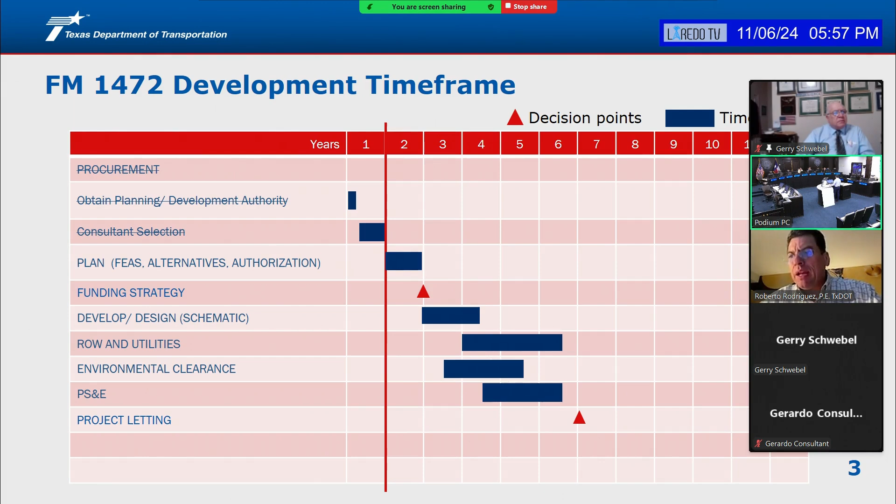Thank you. Now, on the next slide, what I'm going to talk about - there's a couple of things on each highway, in each Texas highway. One is the designation of the highway: is it an FM, is it an interstate, is it a state highway? And the other thing that is critical on our highways is what is the functional classification?

Now, this functional classification is what really determines the funding of the type of project. For example, some of them we start with the minor collectors, that you see on the map - I know that might be a little hard to see, but some of those roads you see in yellow, we cannot use federal funds, we're restricted from using federal funds on those projects. But then what you see in pink, green, and as you move on the colors, is the higher functional classification of the roadways.

As you can see, for Laredo, our principal arterials, which are the highest we can have without being an interstate design - FM 1472, State Highway 255, US 83 - are designated as principal arterials. The only way to move into the next category as far as functional classification is to have a design and a roadway constructed as an interstate. Then they will move to the black color, which is a principal arterial, but is not exactly designated as a freeway, or not designated as an interstate.

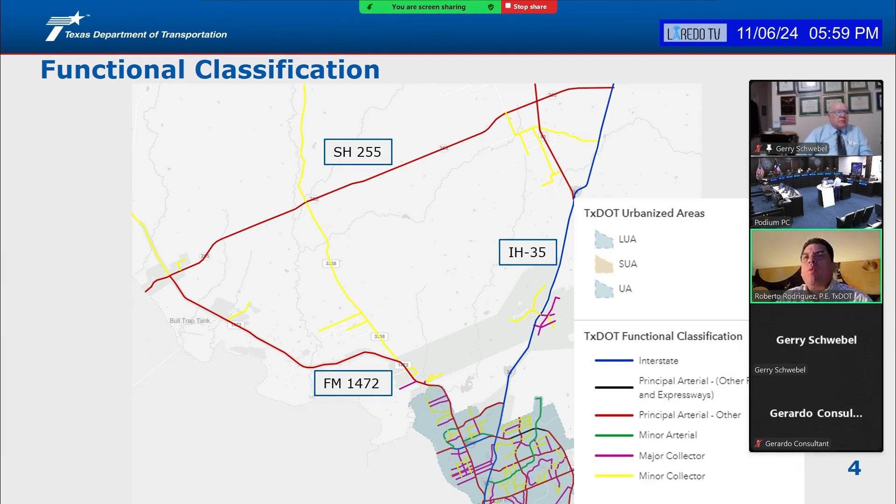This functional classification is critical on our roadways because it really impacts our allocation and funding for the roadways. So I wanted to make sure we differentiate between the functional classification of the road and a highway or roadway designation, which I'll be covering on the next slide.

Now let's talk about highway designation. These are some of the definitions from the Texas planning manual. An FM road is a roadway that is generally in a rural area, which we know FM 1472 doesn't seem to be anymore, given how it's grown with all the development in that area.

Then we have a state highway, which is a roadway designated by the Texas Transportation Commission. State highway loops, or state loops, are usually roadways created as a bypass, also designated by the Transportation Commission. We also have state spurs, and we have a couple of these in Laredo. Those are roadways which usually begin on a state highway and end on an off-system bridge roadway.

And then we have U.S. highways, like US 59 and US 83 in Laredo. Those are highways designated by the federal government through FHWA and AASHTO. Usually U.S. highways connect major cities and major corridors along the state, such as US 59, which goes from Laredo all the way to Houston and continues through other states.

US 83, which I believe is the longest highway in Texas, starts in the valley, goes up through Laredo, goes north all the way to Amarillo, and continues north out of Texas. So this is the designation rule right now.

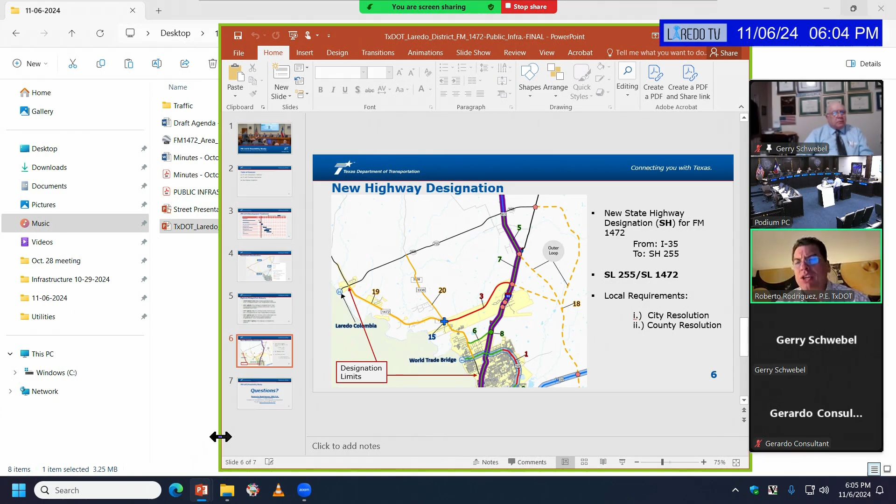One of them is a city resolution supporting this new change. Also a county resolution, because parts of these roadways are outside of the city limits. And any other entity that might be impacted, if there are any park roads or anything, any other entities that will be affected by the redesignation of 1472, will need support letters from them.

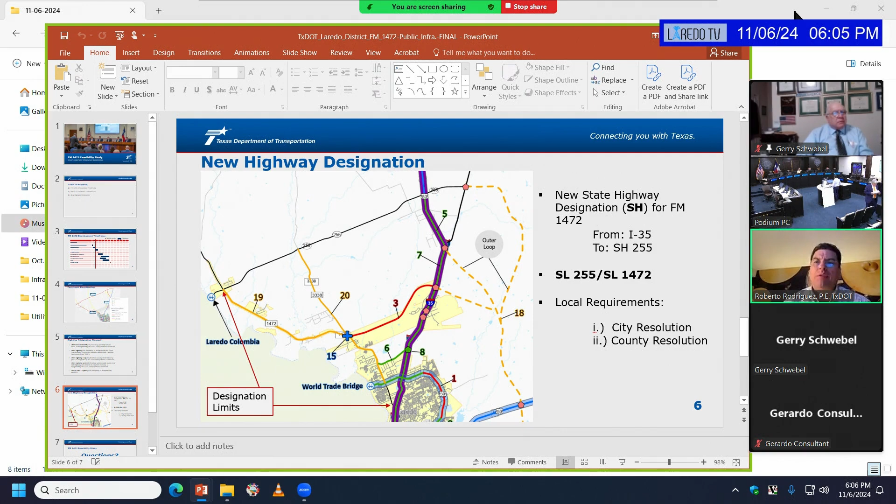If we go with the alternative of doing a state loop 255, the only change will be that if you look at the intersection of 255 and 1472, which Luis is pointing right there, from that point south to the Laredo Columbia Bridge, that little segment will have to be redesignated as a spur. And of course, the area on 1472 from that same intersection north, toward Maverick County, could stay as FM 1472. So it's just a matter of discussing and agreeing what would be the best designation.

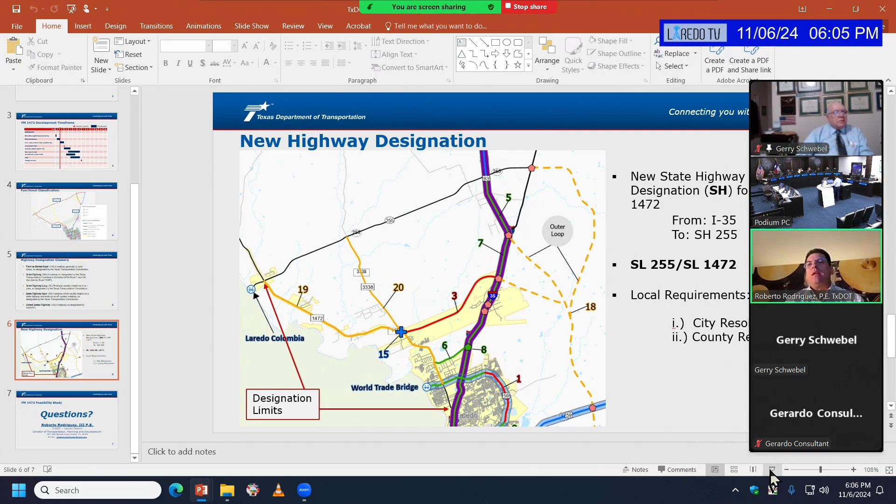Do we want to create a loop with 255, or do we rather just have a separate designation on FM 1472? Mr. Rodriguez, Commissioner Narvaez has a question.

Mr. Rodriguez, I know you mentioned Maverick County. I know at one time they were discussing the possibility of connecting the one road to Eagle Pass. Is that something in your projections also?

At one time, Webb County and Maverick County had plans to do a connection between those two roads, FM 1472 and FM 1021. The plan, back then—if I remember correctly, I wasn't in this position, but I want to say TxDOT allocated some funding to help the counties with the study. So what we requested from the study is to do the feasibility study and come up with the right-of-way designation, which means from here through here, this is county road. Now we can transfer that right-of-way to the city, to the state, so the state could come in and build a highway. That pretty much didn't go through.

I'm sure Mr. Schwebel, Gerry, was actually very involved in this initiative and can probably give us more details. I believe the last time the discussion was that because of grade separations, there were several creeks between Laredo and Eagle Pass. I think that was the reason it was put on hold, because they felt it was going to be kind of expensive to do all that.

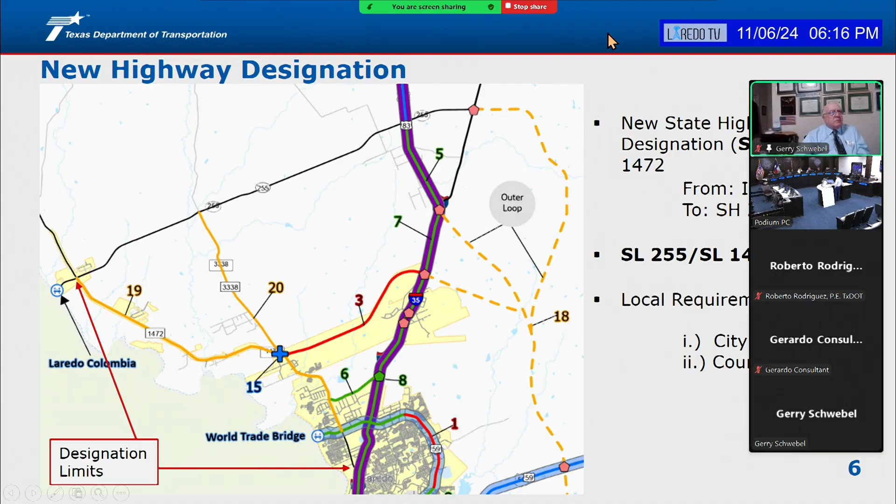Any other questions for Mr. Rodriguez? Just to thank him. Thank you very much. Thank you for your time.

Moving on to item number 7, presentation by Public Works Department with possible action and any other matters incident thereto.

We have a pamphlet in front of us. I don't know if you'll be putting that on our screens as well, Mr. Chavez? Yes. Excellent.

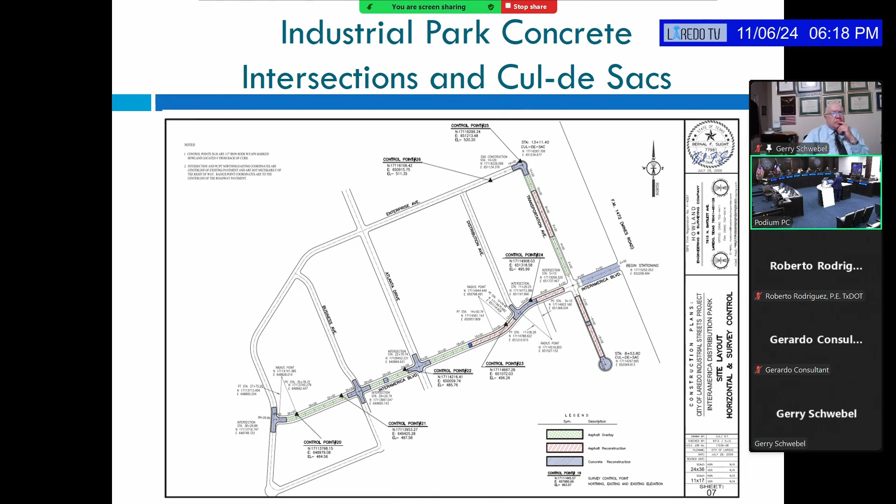That gives you an idea of plans that were developed back in 2008, 2009, when we got the $20 million grant from the state and implemented it there. There's a cross-section of two of the different examples.

So we'll go into numbers. We have 120 intersections, currently asphalt. That's not including some that are already concreted. At $375,000, 10 inches thick of concrete, that'd be $45 million to concrete all the existing intersections of industrial parks.

Cul-de-sacs, 104 of them at $210,000. The intersections are 250 feet by 250 feet in both directions. Cul-de-sacs again are $210,000. Concreting them all is close to $22 million.

And then of course paving all the remaining streets, which adds up to approximately 52.5 miles at $1,248,000, because they're not just standard residential streets, they're 27 feet back to back. So that's $65 million.

So total to do all this industrial park improvements, we'd divide the $132 million by 10 years. We'd be looking at a bond of $13.2 million per year for the next 10 years. And if we divide it by 20 years, you get $6.6 million.

Anything to report in the next meeting that you all would like? Anything else? Any more information? Motions? Mr. Schwebel, do you have any comments? Gerry? Oh, no, thank you very much. This is very informative. Thank you, sir. Okay, no action taken.

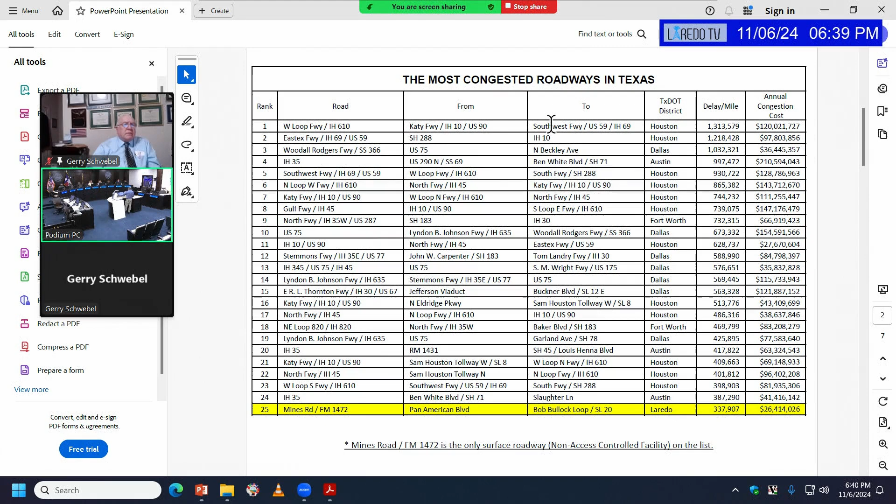There's no overpasses, no frontage roads or anything else. It's just a regular surface roadway, and that's for all vehicles. Number 25. If you went to the trucks, we're number 2 again. Like I said, we're still a surface roadway.

Really, that's the way traffic works. There's no magic pill where we get rid of all the traffic and get rid of all the congestion. So we're going to try to do the best we can. But it's a different mechanism for funding.

Yes, it's a highway when it's a farm road. Exactly, that's why they moved it. They need to put a second story, just let them do whatever they have to do. But compared to the rest, they're all metropolitan cities. We're a little town. It's part of your triangle. Yes, it's your state triangle.

And the one thing to look at is, we're the largest inland port in the nation, right? It's the amount of delay. Like I say, in a business environment, time is money. You have all that delay, the trucking industry is going to find a way to get away from this delay, to get things faster, and they're going to find a better route. And if you look at the congestion cost, $26 million a year, we want to see what we can do to decrease that amount as much as possible.

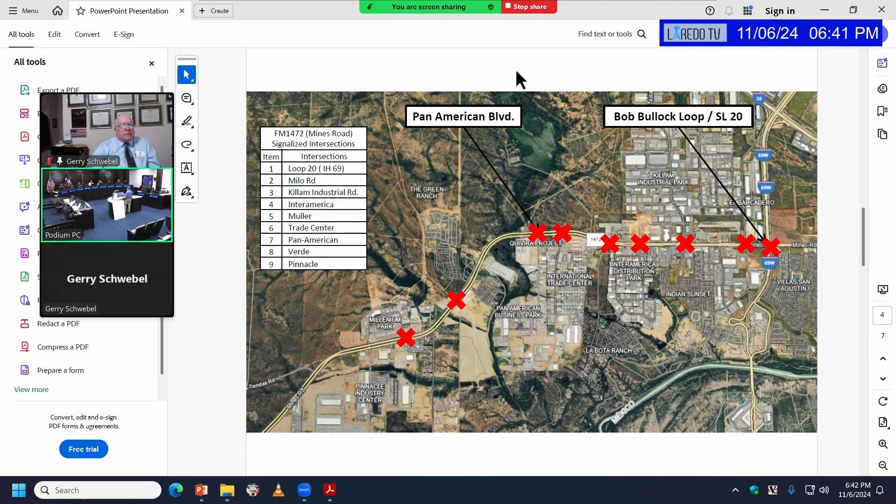So looking at the cost, what we want to do, design cost is about $310,000. That's for the engineering and contingencies, to have a little bit of a buffer in there in case we add other things to it along the way.

Construction cost, there's 9 signals to do the upgrades on each individual signal. That's putting in new cabinets, larger cabinets so we can put more equipment in there, and new cameras on each individual cabinet. The total cost is $720,000. We've got another slide later on showing what the cost is per signal.

But then we need to make sure that each signal is talking to one another. We want to upgrade the communication system, running fiber optic cables between them all so they can talk to one another. That will cost about $900,000. That's roughly close to 4 miles worth of fiber optic cable, conduit, trenching, boring underneath the highway, and everything else involved.

And then we want to do some upgrades to our traffic management center, because once we get the communications, we want to get them to our traffic center, so from there we can see what the signals are doing and actually make adjustments on the fly to make sure we can get the traffic flowing again.

That's about $360,000. Then you've got to figure out the bond cost for the contractor, his mobilization cost to bring in his equipment and do everything — that's about another $200,000. Construction engineering, to make sure we're testing everything they're doing out there, going through the testing periods and doing all the inspection, about $130,000. And just in case, for the time between now and whenever we get to construction, about another $140,000. Total cost is about $2.49 million for that.

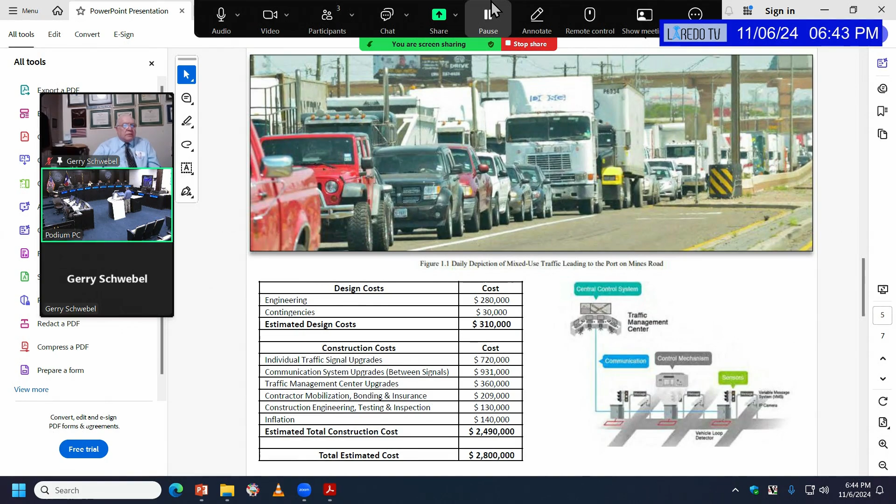That's what we want to see from our traffic management center with the upgrades. We have a traffic management center now, but we don't have Mines Road out there fully the way we want to have it upgraded. I'll give you a good example.

Right now TxDOT has a contract doing synchronization work on the signals out there. Yesterday morning there was quite a bit of backup near the Pinnacle and Verde intersections. We saw it on Google Maps, I saw it in my office, so I went over to our traffic center and told them something's going on out there. We started looking at the cameras to see what's going on, but couldn't see anything other than the traffic backing up. No accidents or stalled vehicles or anything like that.

So we got a hold of TxDOT and their consultants working out there, and they changed the signal timings. We have a 180-second cycle, so it's about every 3 minutes that goes a complete cycle through that signal. While doing their synchronization they changed the cycle from 180 seconds to 160 seconds, knocking 20 seconds off each cycle, thinking they could get the traffic flowing better. It didn't work, so we went in there, got with them, got their approval, and put our 180 second cycle back in. It took roughly about 3 hours to get the traffic flowing again.

Is that normal? They normally go in there without consulting you?

Well, because it's their project, they told us they were going to do it, we reviewed their plans and told them it looked like it would work, so we went for it. When we started seeing the results, we went in and took the lead and said let's make these changes and go back to what we had. We got back with the consultant this morning as well, and they said okay, we'll cancel our sequence, revert back to yours, and they're going to study our previous sequences to see what they can do to modify and tweak them. So it's an ongoing process.

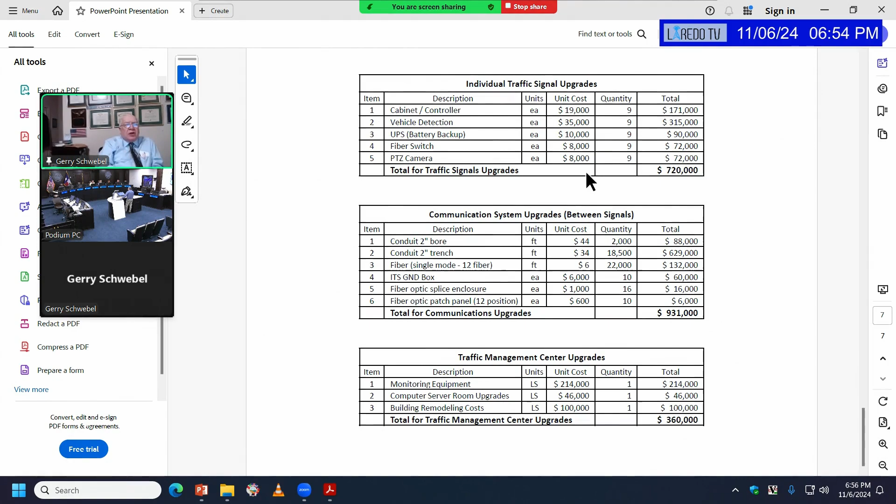Second question is, when you're looking at that breakdown of the congestion and the cost of congestion on both Loop 20 and Market or 1472, how much discussion is there with developers building residential or industrial park areas prior to planning for an anticipated number of additional vehicles? By that I mean, let's say on the loop there are 5 new residential areas putting up 200 homes. What formulas do you use? Is it 200 homes will have two cars per home? Over a period of 2 years there'll be an additional 400 cars with ingress or egress off the loop. Do you have any of that planning with the developers?

We work with the developers, and what they do is develop what's called a traffic impact analysis. We don't have it in our ordinance fully right now, making it mandatory to submit the traffic impact analysis. But as they're doing developments, depending on the size of the development, that depends the extent of the impact analysis needed to figure out how much additional traffic that development will generate on the roadway, and from there what type of improvements are needed, whether on site within their development or on the approaches to their development.

My concern is about best practices. Are we reacting after the project is built, or are we planning, not just the egress, knowing that we're going to mix, like Mines Road. One of the challenges we've had over 24 years as the World Trade Bridge was built is mixing residential areas with industrial areas, mixing cars with trucks. Truck volumes go up, car volumes go up with more residences and more people having cars, 1, 2, 3, or 4 cars. But how is the infrastructure planning for 1472 or the loop done to accommodate that increase in traffic anticipated for 5, 10, or 20 years from now? Are we just reacting once it's built and seeing how many more vehicles there are, then figuring out a strategy? Or are we really having strategic sessions on how to plan the mobility of that increased volume of traffic through areas being developed, be it the loop, 1472, South Laredo, wherever? How is the city traffic management system working with the developers?

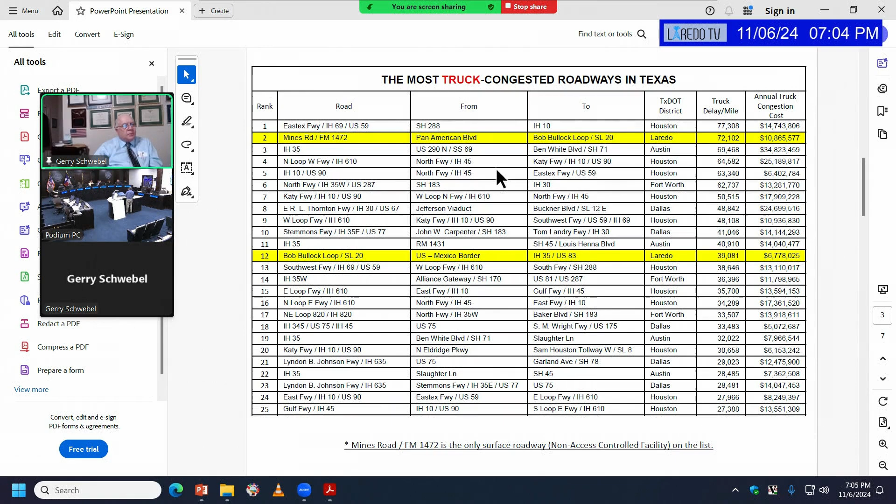I think one of the concerns is just the tractor itself roaming around and parking in Popeyes and other public places, damaging the normal streets. They shouldn't be allowed to roam around empty. I think that's where the parking lot should come in, because it's different when you have a truckload that has to go to a warehouse and it's going to sit outside.

That's where he's going to sleep, because once he turns on that truck, the driving hours start. So he'll wait till they open the warehouse, talk to the guy there, wait his turn—number 5—and he's not going to turn it on until he's ready to get loaded and take off.

So there's pros and cons, but something has to be done with those tractors that are just roaming around because they don't have a terminal, and they're destroying our streets and congesting them more. That's an observation—the parking lot at HEB Plus is a prime example, there's always trucks there, always.

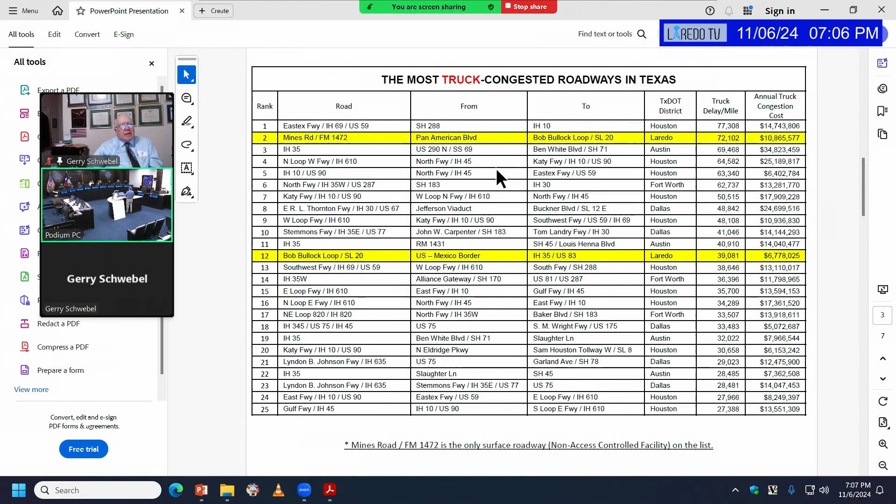Well, to me, I think those just come to pick up loads and make money. They don't leave anything in this port, but they use it to make money. Just something as an observation.

Thank you. Any other questions, concerns, motions? I'd like to entertain a motion for his proposal—I like it. So you want a motion on the floor to take to council the $2.8 million? Yes, to suggest $2.8 million for this project to get funded.

Second. There's a motion and a second. All in favor? Aye—1, 2, 3. All against? None. Unanimous? Okay, all in favor, it's unanimous, motion passes.